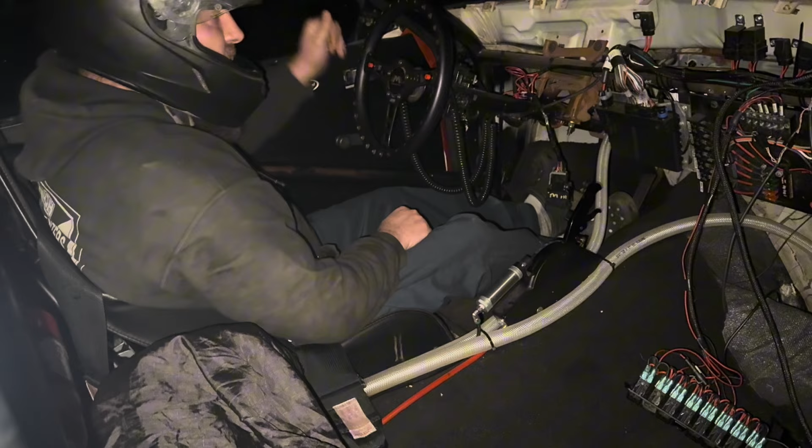Well, this is kind of awkward. Got the car unloaded, kind of got a lot of things on my mind trying to get this sensor stuff right, kind of rewiring some other stuff. And the whole point, we had the sensor data all jacked up, fixed some stuff, thought it looked good, built a curve.

So I was planning on turning the traction control on. We're out here to make a test hit tonight. And I get here, get the car off the trailer, and the dash is at the house. So my digital dash, I'll have all my traction control stuff on here to turn on.

Yeah, I ain't got nothing. My lights are hanging, they ain't got crap. So I'm out here, car's already got heat in it. I'm just gonna go ahead and make the pass anyway, because we can still get the drive shaft curve to make sure that it is in fact fixed. So here we go, let's rip this bitch.

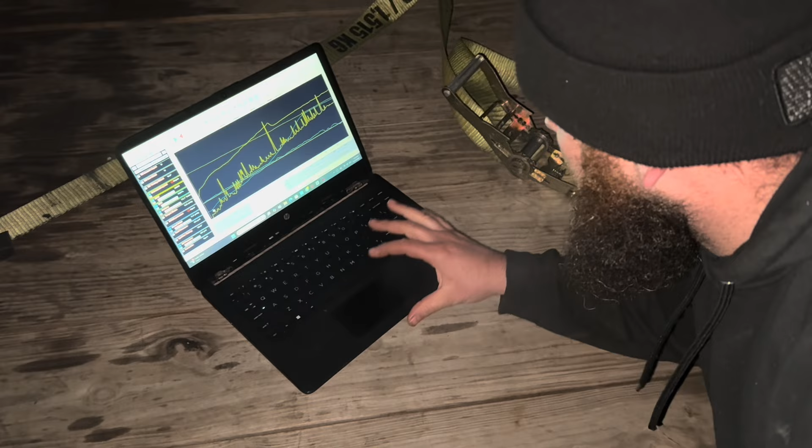Damn, that bitch was riding. All right, well the pass was good. However, the data is not. Holy crap, this is not what it looked like when I tested it before I came out here. This is not gonna work. All this is bad, this is all bad. You can't use this for literally anything.

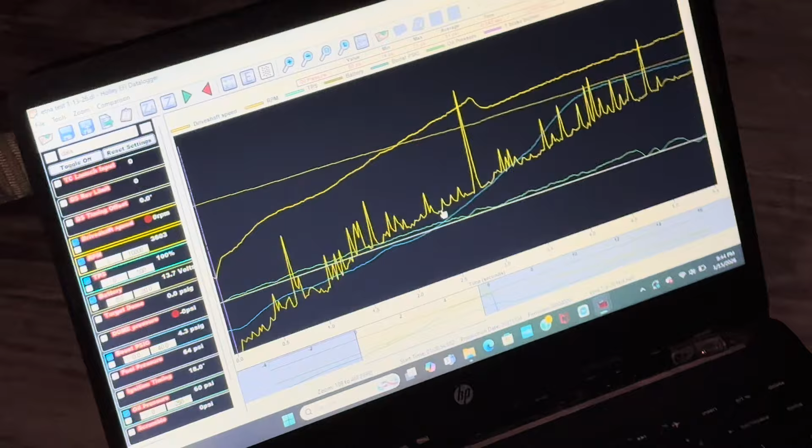How Holley's traction control works, once you build your line, none of these can go over that. We would be hooting and hollering all the way down through there. So we're gonna go back to the house and figure something out, because this ain't it.

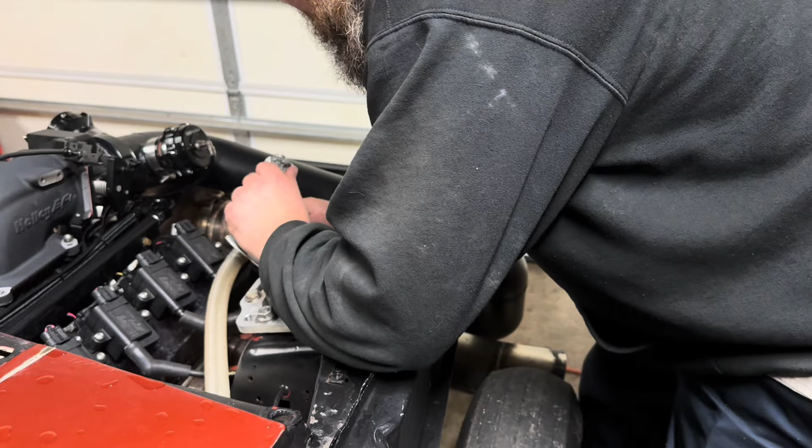What up, what are you doing? Why are you recording me? Because this is secret shit. Secret. Yeah, I'm putting this traction control lube on my spark plug wires. Why are you laughing? Do you want to win or no? Yeah. Oh, what's so funny? Nothing, I guess. You see that?

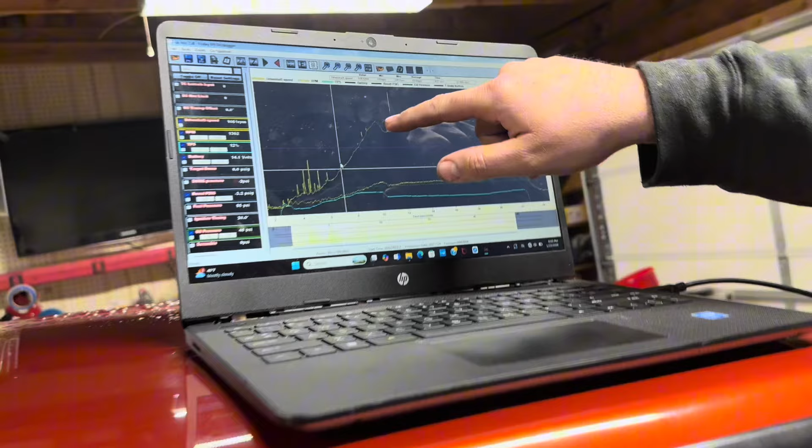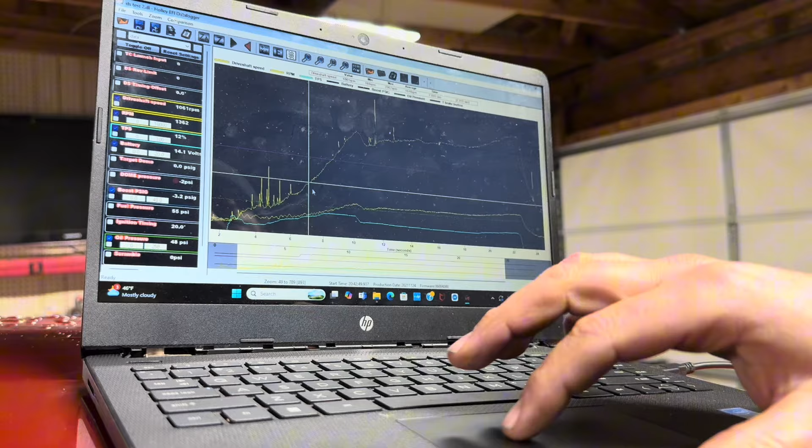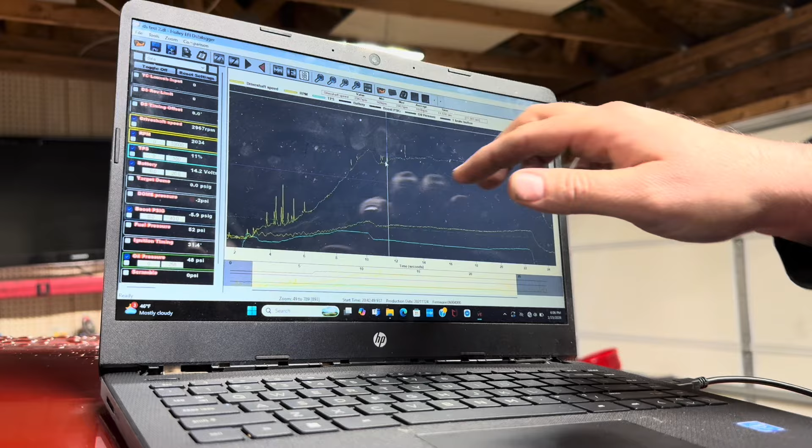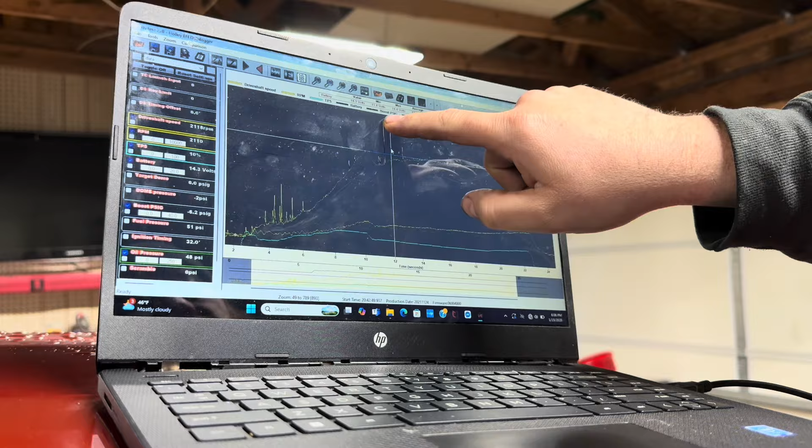So this is my drive shaft curve, this is part 2 of our drive shaft video. I thought I had it fixed and I wasn't even gonna post it because I don't know, but it's not fixed. See this big spike? That's not good. So we go from about 1900, here's your drive shaft speed, about 1900 to 2900, that's 1,000 RPM difference. So when you build your traction control table, it's kind of just going to come through here like this. As soon as it hits that, it's going to pull timing. So you're pulling power out for no reason.

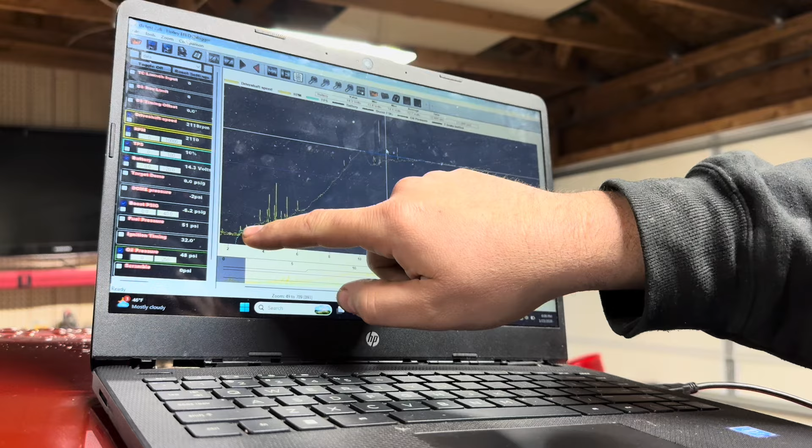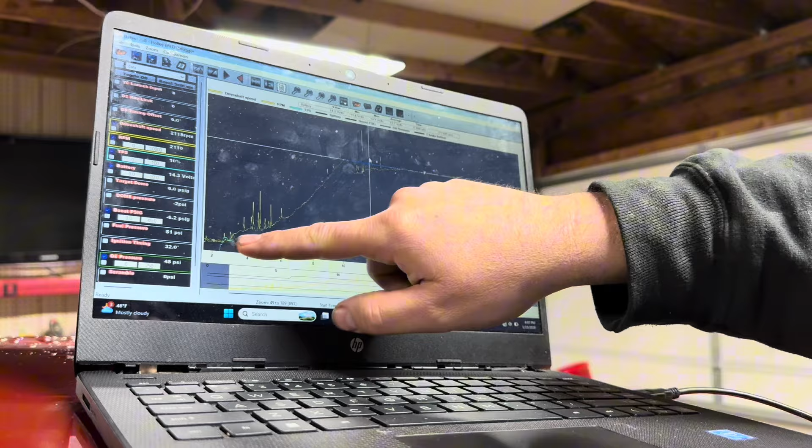Same with right here, this was just on jack stands, when I just put it in gear and let it roll, rolled into the throttle a little bit. So say this is your 60 foot and you build your curve right here above my fingernail as your baseline, and you got all this wonky shit going on when you're not even spinning, it's going to be pulling power. It's going to hit your retard A, retard B, cylinder cut. So you're cutting cylinders and you're not even spinning.

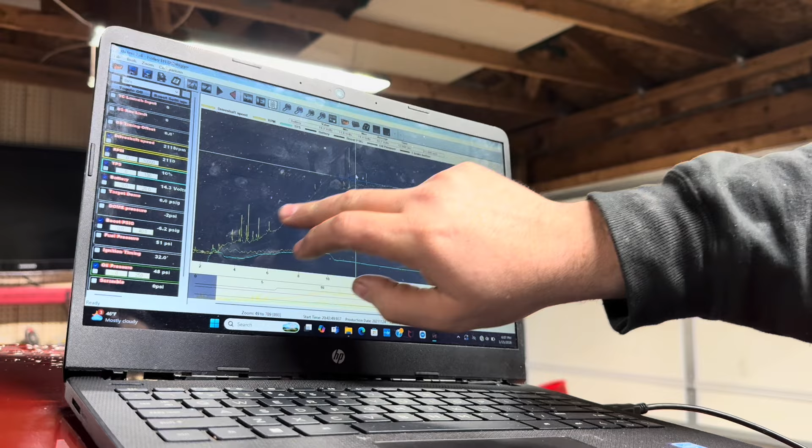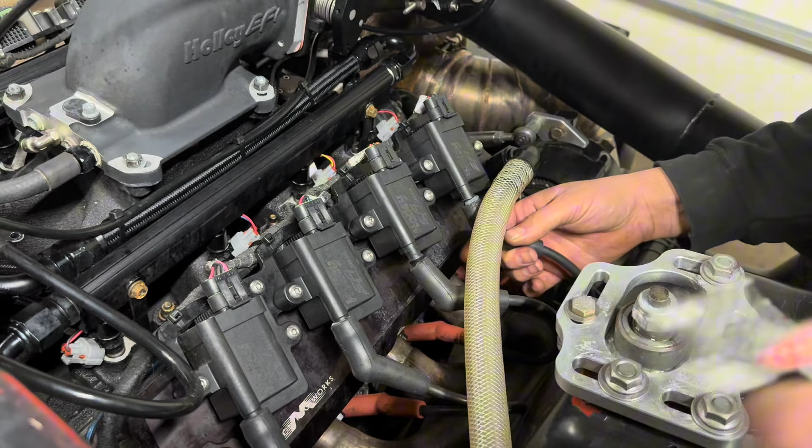So yeah, I'm gonna finish up doing these, and then probably gonna adjust my sensor gap as well.

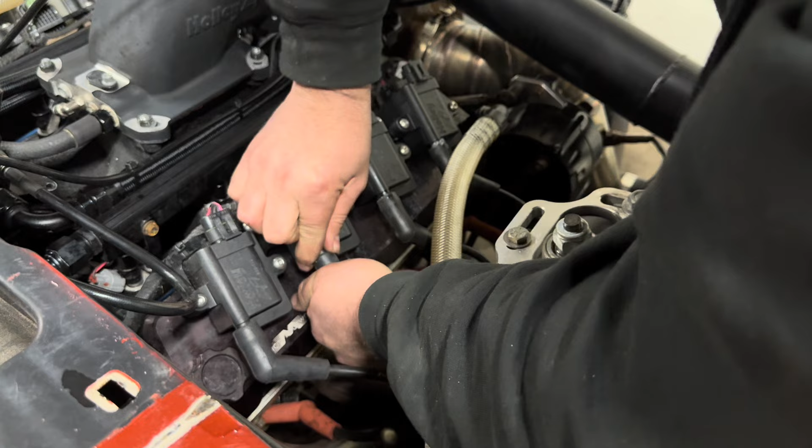A lot of people say, can't tell if these things go on or not with these. A lot of people say junk wires can do it. Oh, I think I'm on there. What the heck's going on with this thing? Maybe that's my problem. No, that's clicking. These are fire core wires, I'm not really too worried about them being junk.

So I'm going to try this. And then I probably will do a little test before I change the sensor gap, just to see where we're at.

Now here I'm going to show them something else. So I've done 2 tests. Hold on, don't show them the screen just yet.

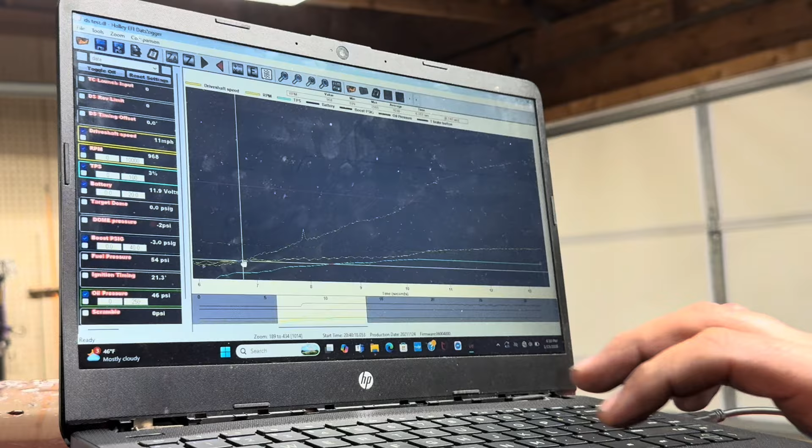So this test right here is eleven mile per hour. It's not nearly as bad. I did the same thing - it's on jack stands, and I just kind of rolled into the throttle. And it's going up pretty smooth, a lot smoother.

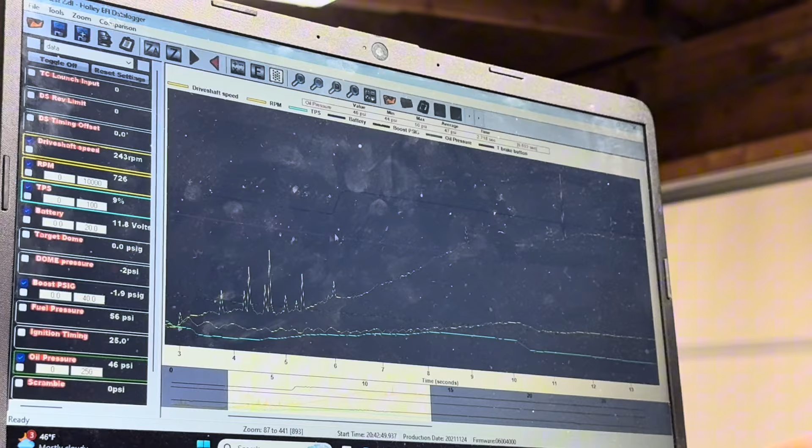Pull away for a second. Okay, it's a lot smoother than this. We got a whole lot of crap going on. This is under RPM, so I'm not really sure - drive shaft RPM, this both were drive shaft speed. One was reading in RPM, one was reading in mile per hour.

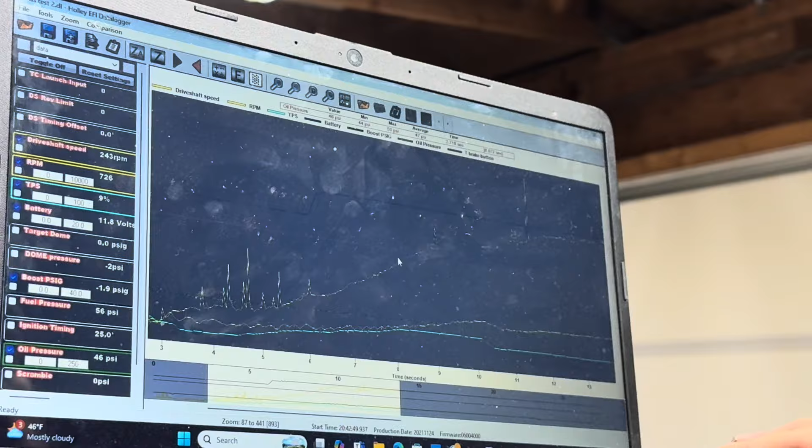So we're gonna see what this dielectric grease does.

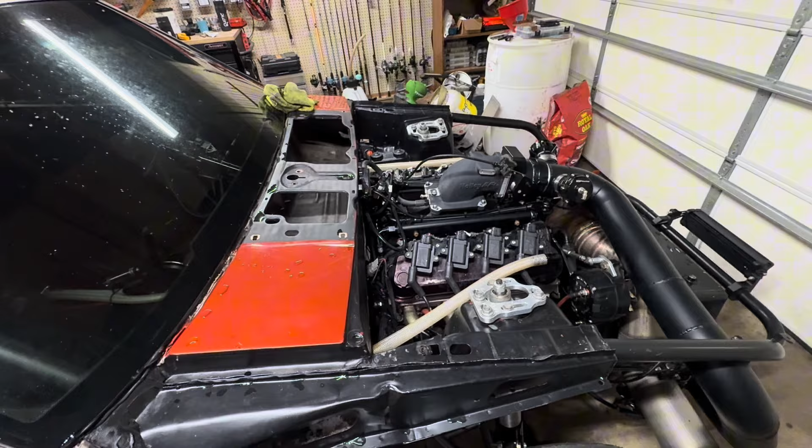Alright guys, so we got all the plug wires, put dielectric grease on all the plug wires. I was gonna just test it now, but honestly there's some things about the sensor and how it's sitting that I don't really like anyways.

Again, so since the last video, I swapped my sensor from 5 volt to 12 volt and got some shielded cable, and I grounded it to chassis ground to eliminate any of that stuff.

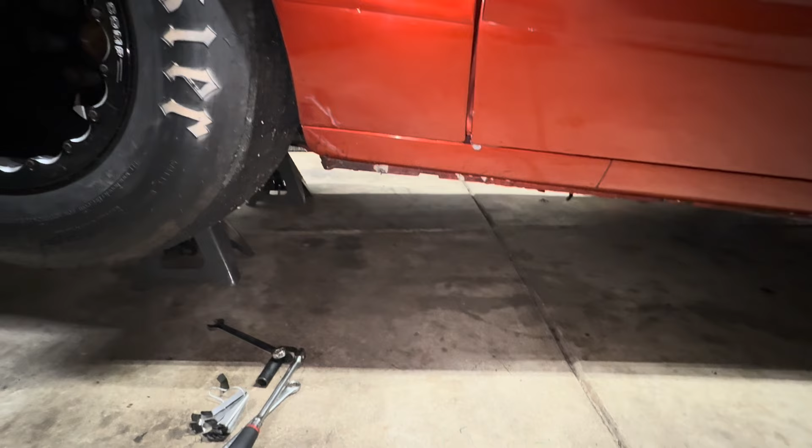So I did a little test and it seemed to work okay, just how I have it sitting like this, and it seemed to work really good and really clean. But when I went out and made a test pass the other night, the data was literally horrible.

So we're gonna go under here and check out this sensor and collar and see if we can do some adjusting.

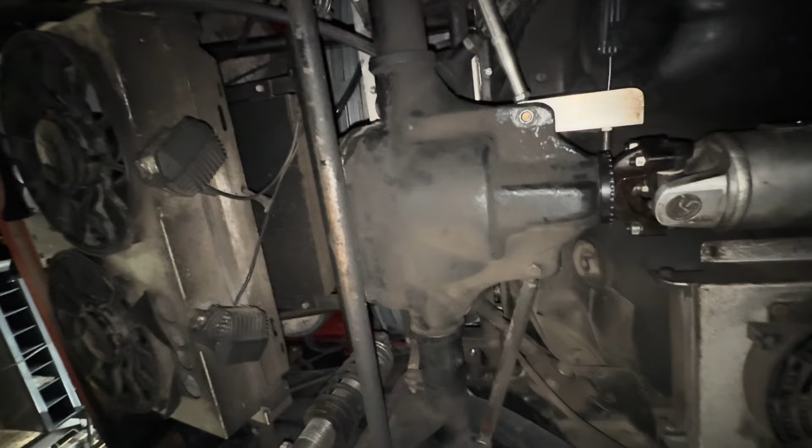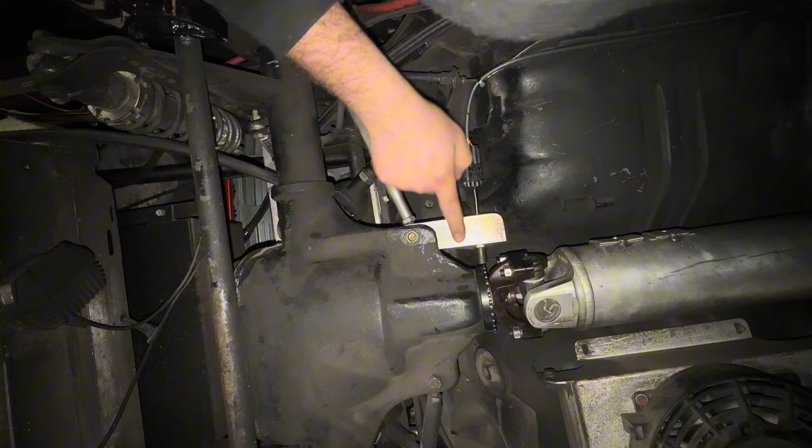Should be able to see that, I think. So I don't know how well you can see, but I'm gonna try to move my bracket forward a little bit because it's not exactly centered on this.

I don't know how much play I have in this. Oh, I have enough, I think. So I'm gonna make it like that. I moved it about 1/16 of an inch probably.

Find all the rest of the tools. I want that sucker moving. Yeah, that looks a little better maybe.

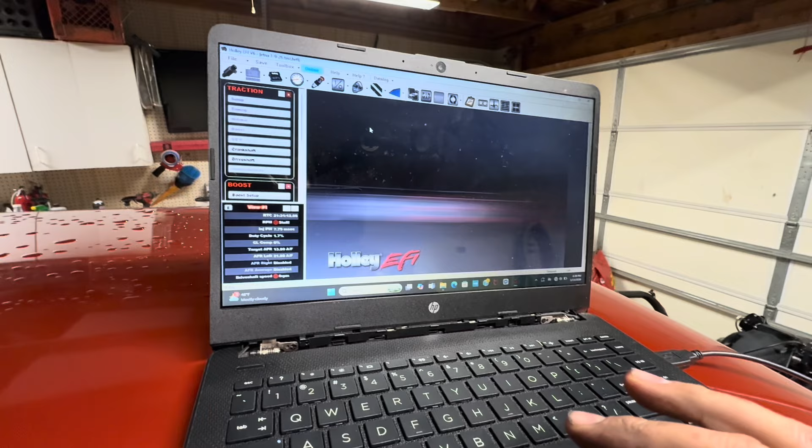Let's try that, let's see what we got. All right, so we're gonna fire this sucker up. I'm gonna go online right here. Might be kind of hard to hear me, but I'll try to talk a little louder before I start it. I'll tell you what we're gonna do.

So I'm gonna go up here. All my data logging stuff is all off, trans brake and throttle and all that stuff. So we're just gonna hit this clipboard right here, and that'll clip us a log without having to floor it or do any of that stuff.

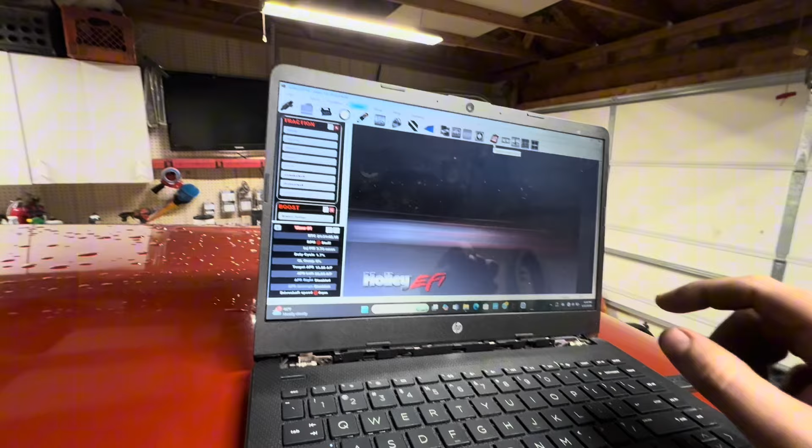So I'm gonna start a log, and we're gonna put this thing in gear and let it spin. And now with it being on jack stand, you're gonna have some driveline movement, so that's why I kind of roll into it a little slow, to take that slack out. And we'll see what we get.

All right, we're gonna go up here. We're gonna hit that.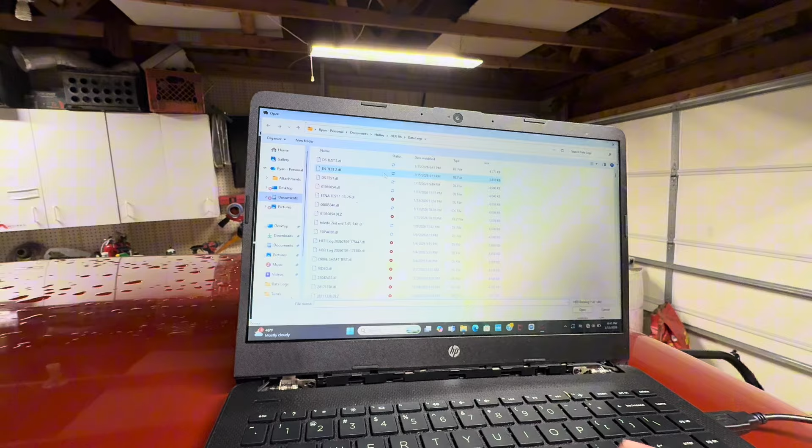Alright. Holy crap. Jeez Louise, what is going on with this freaking thing? See? All that. No bueno.

Again, this could be because it's on jack stands, but I don't really trust it. So we're gonna try a couple other things.

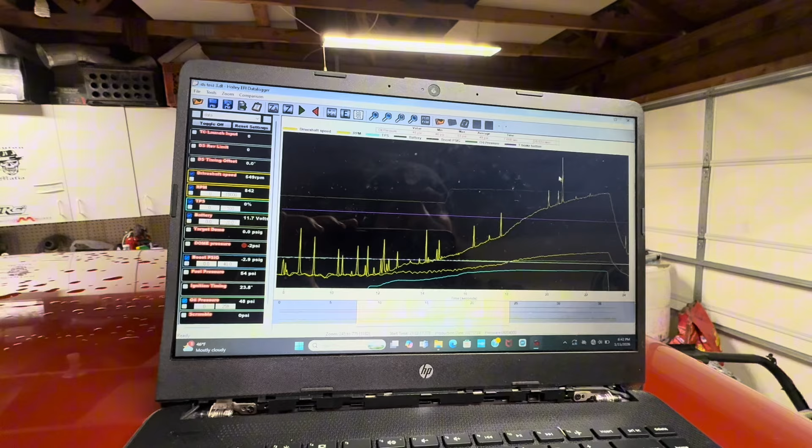Alright, so don't mind that. That's freaking Ford racing block. Billet Ford racing block, just a little corroded.

Alright, anyways. So I turned the sensor 90 degrees of what it's supposed to be, and the data looks a little better. Looks a lot better, actually.

So we're going to try something. I'm going to jack this sucker up, get it off the stands.

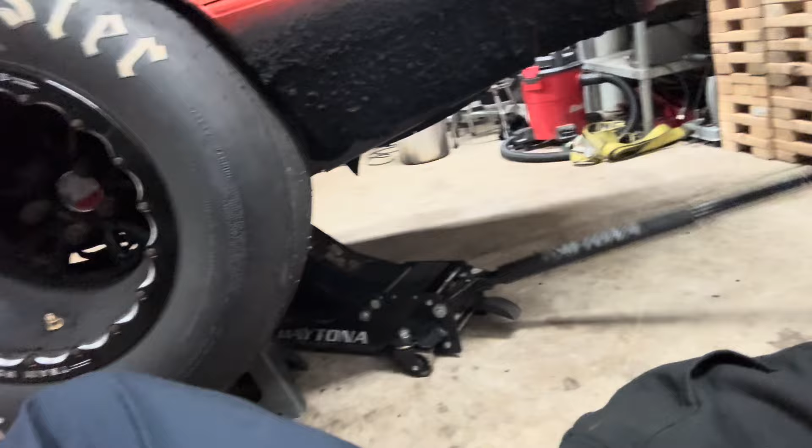Come with me here. Take that out the way. Oh, lower this sucker down without killing myself. Okay, I might need two hands. Hold on. All right, there we go. Okay, alright.

Let's check out some data. See what we got here. Oh, we're in the stupid light thing again.

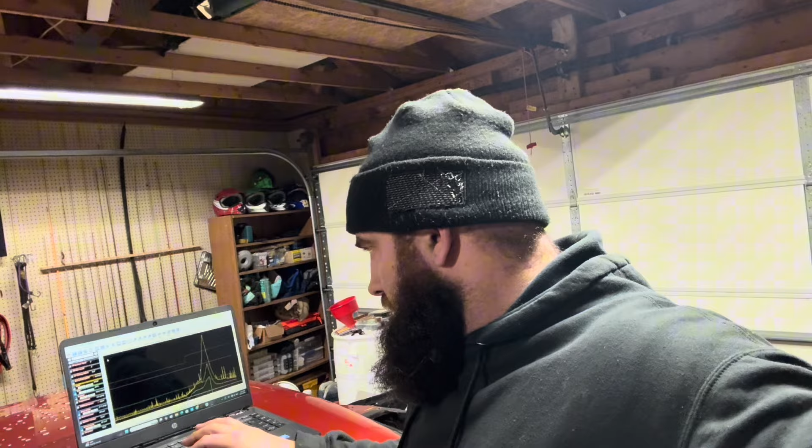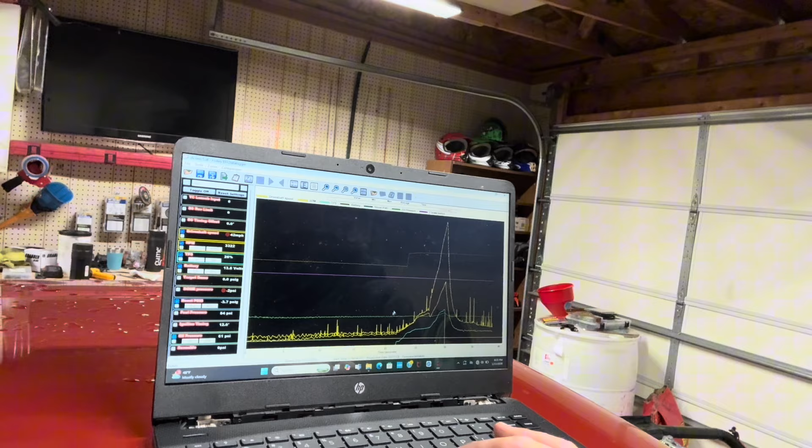All right, so this, things might be backwards, I don't care. This is just probably gear slop.

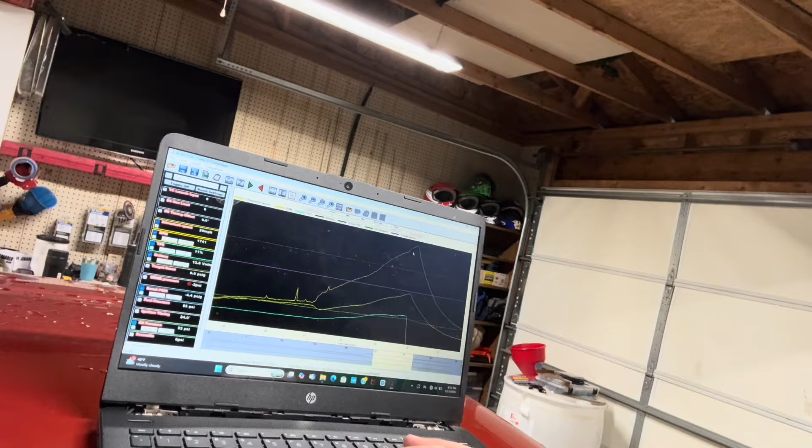But that looks a lot better. That's kind of what it looked like the other day, so I'm not really sure what happened. So that one's in mile an hour after I adjusted it. This one is in RPM after I adjusted it.

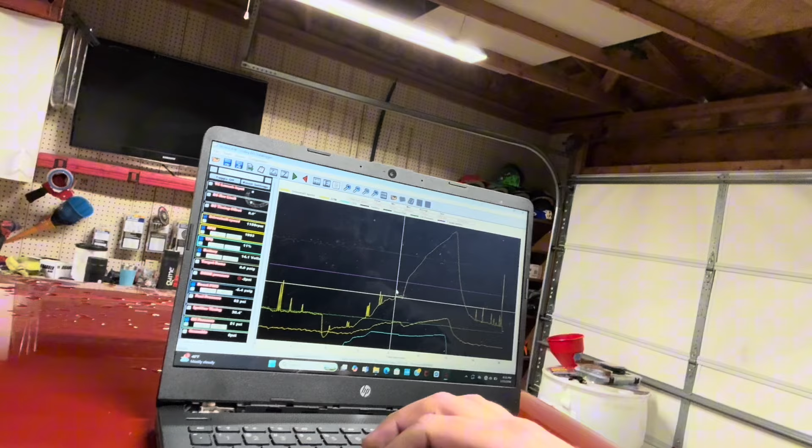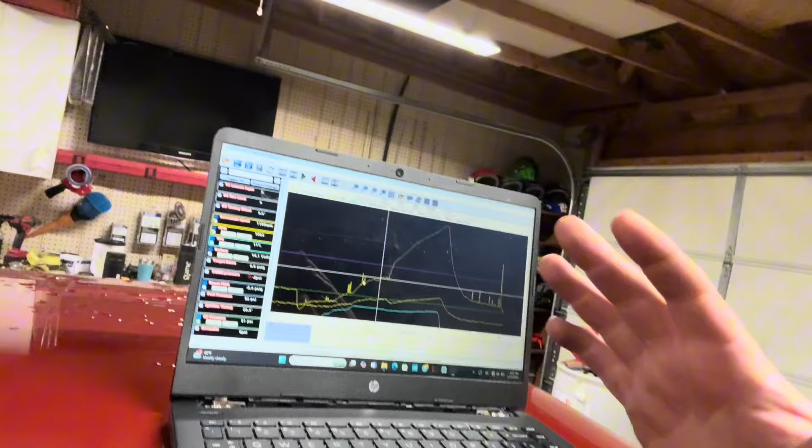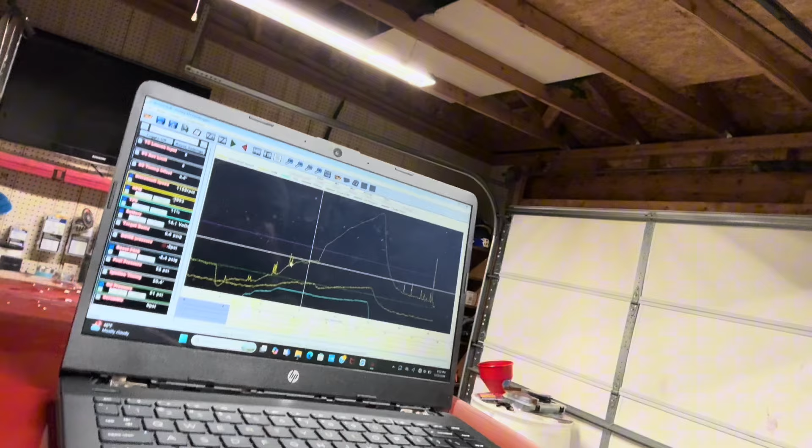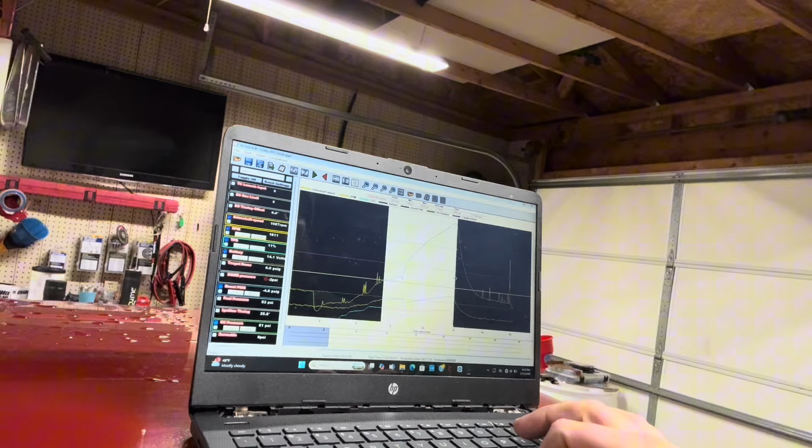So a lot of this here could be just gear slop from where the car is just kind of chugging along, and you get a little tum tum tum tum tum in the gear. Not because it's about to fall out, just there's gear slop in there when the tires aren't on the ground and the motor's cold, small block Ford chugging along. But once I started rolling into it a little bit, it smooths out.

So I'm gonna do a burnout in my garage, just so I can get some pressure on the tire. It's probably not gonna be anything crazy, just a little tiny squealer.

Think this is a good idea? No. Why? It's late. We need traction control.

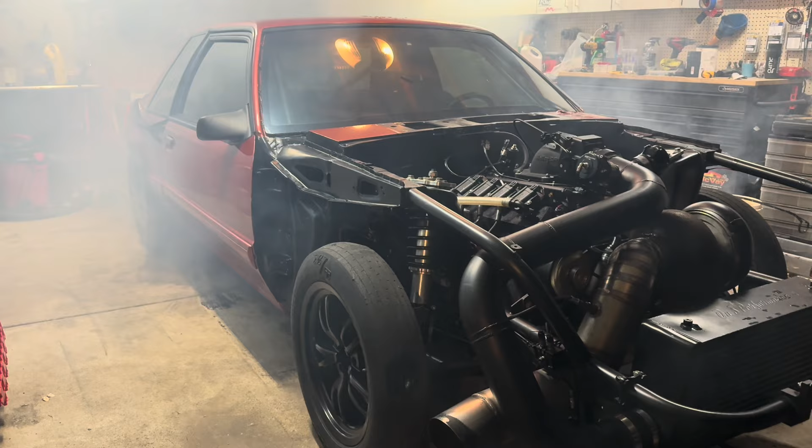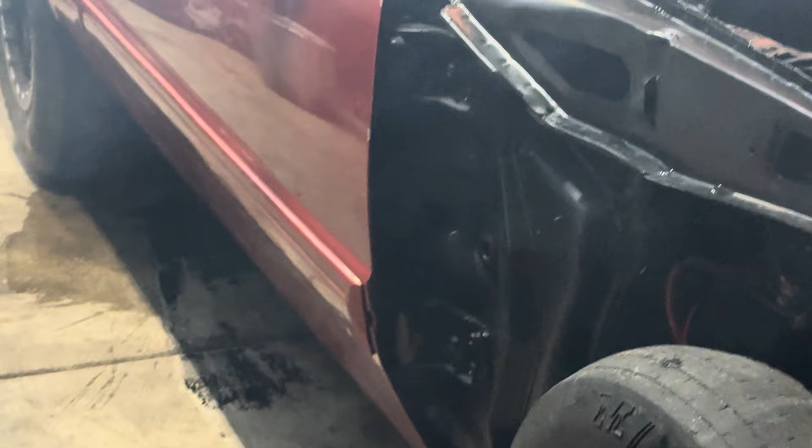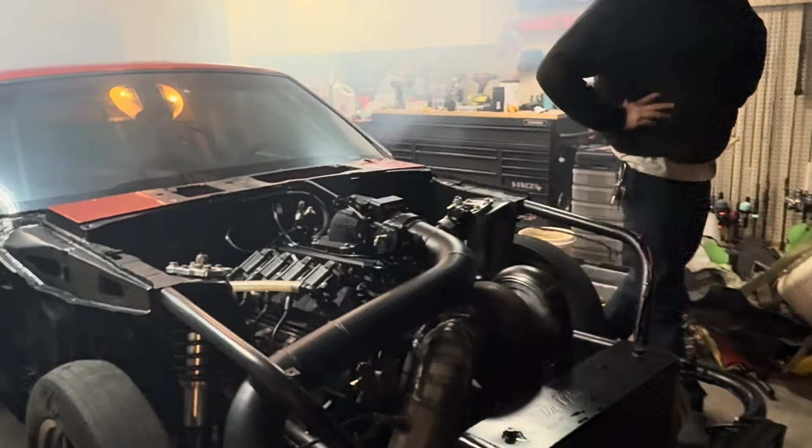That should give us a good log. What do you think about that? Did you hear that sucker hook up? I think I'm about to choke and die. What happened? Oh, sorry, got an oil leak.

All right, let's check this log out. That's pretty good. Did you hear that sucker hook up? About did a wheelie right onto the trailer. That's what I'm talking about.

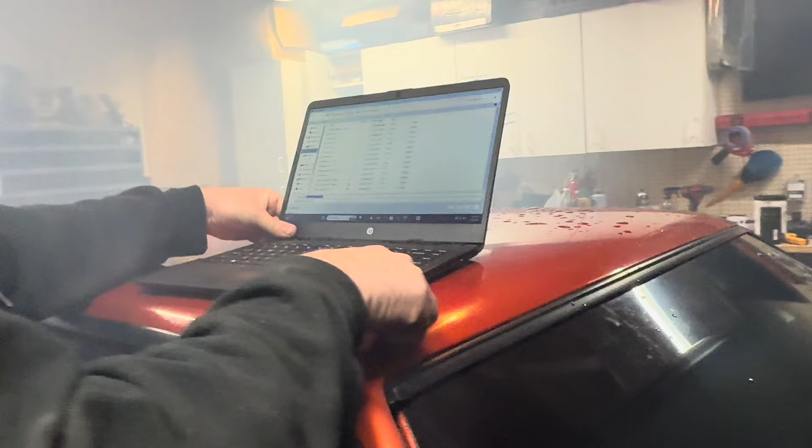Fucking burning tires. Look, so much power busted my laptop. Oh my God, that sucker's digging, I'll tell you that right now. Drive shaft test. Power. All right.

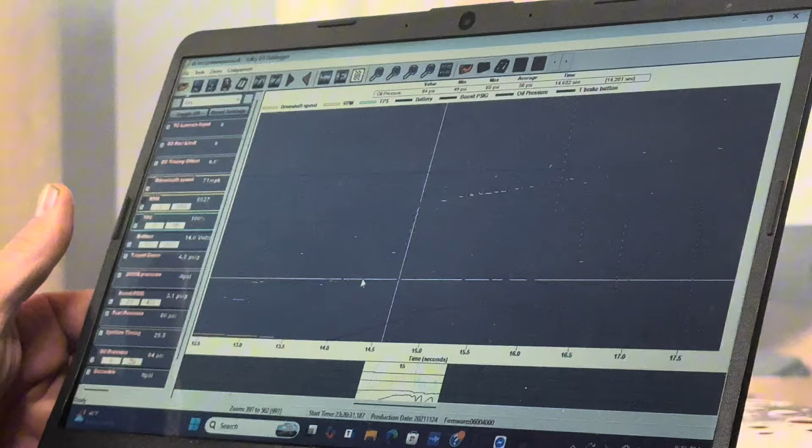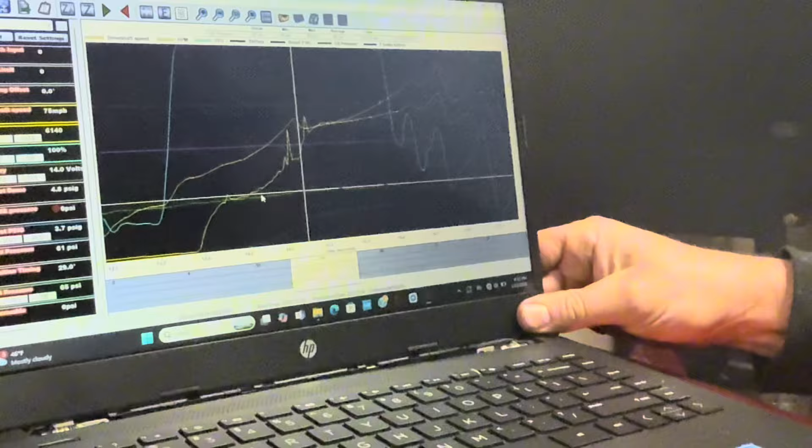I don't know, what do you think? Can't see it. What do you mean you can't see it? That's not good.

That's the old Jimmy Dale womps there, I think. Was I womping it? My ears just quit working. It was kind of loud. Kinda, the small block Ford gets the humping out up there in them big RPMs. Yeah, in them residential neighborhoods. Oh, we ain't worried about that, this ain't no HOA.

This is BTA, beat that ass. Okay, well, that didn't fix anything. So now we're still no traction control and probably need new tires now, and busted laptop from where she said, when you get that out of her, you know that fucker's digging.

Watch my door, that was you. Actually, don't matter, I'm about to come off next. Oh God, all right Jeffrey. No, Jeffrey has doors and a front end. Jeffrey done climbed in the back of the freaking clown truck. He ain't hanging out with us real men, he done went back on the porch.

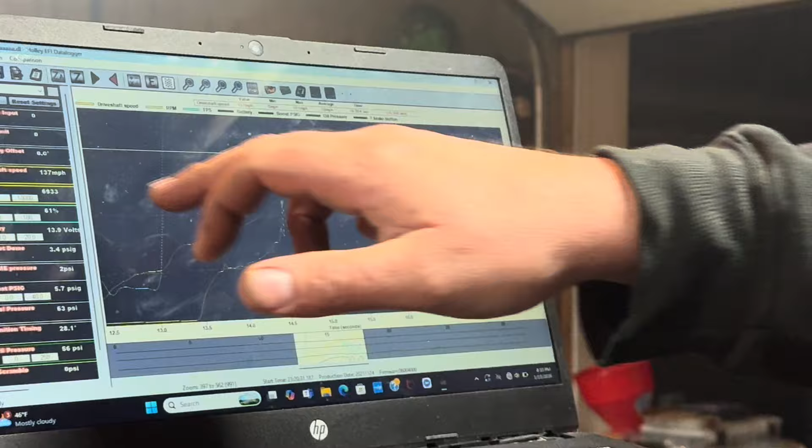I'll tell you one thing, look at that. Oh, let's see. I mean, we had them tires humping 161 mile an hour in the garage. Ain't bad. Good thing I chopped gas as soon as it hooked.

Okay, well, back to the drawing board we go, I guess, because that there ain't gonna work. That's gonna... I mean, that's my shift, so I can see this here, maybe.

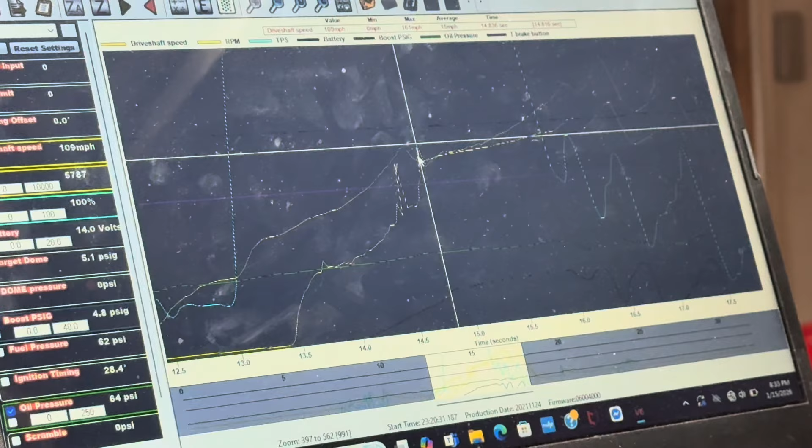You need to clean your screen. Yeah, and we're in a burnout. I don't know, some of this other stuff's clean. Maybe we'll make a pass when we ain't on freaking 4-second concrete and water standing still, you know what I mean?

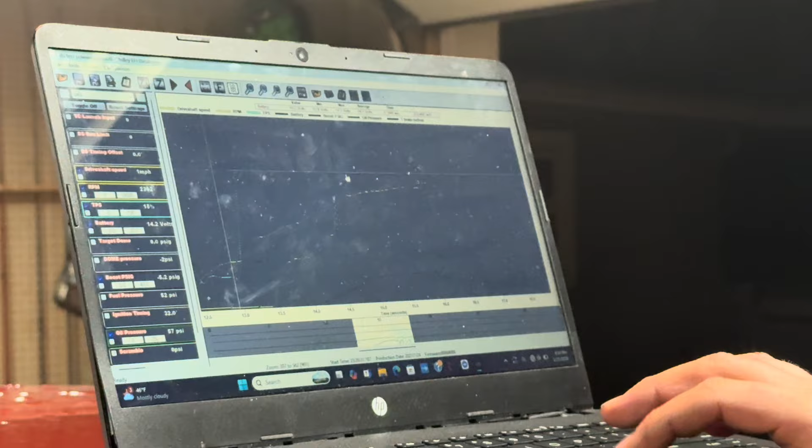But this is TPS here. Where's TPS? I got it on it. Oh, I didn't even lift, bruh. See that? I was in it to win it.

Okay, well, we're gonna call that pretty decent, actually. We'll go make another test pass, and can't right now because it's like 8 degrees outside, and they just salted the roads again.

And then of course I got the fastest Mustang in the state coming to get worked on here, how convenient. You guys know that blue car guy, yeah, he always tries to get under my skin when he posts fastest street race Mustang in Ohio. Bro, like you bringing it here to the fastest Mustang street race shop, my boy.

Anyways, so we'll probably wrap this video up. This data out here is pretty clean, it's kind of matching my RPM really close. So next good day we'll go out and see if we can't get it a little closer, or see if it ain't totally fixed when it's actually stuck making a pass.